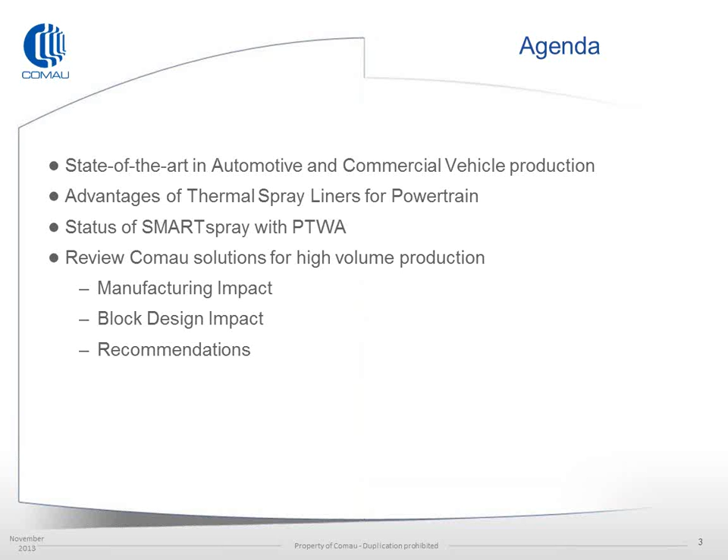We'll go over the state of the art of the automotive and commercial programs, the advantage of thermal spray liners for powertrain, the status of Smart Spray with PTWA here at Comau, and we'll review some of the solutions we have for manufacturing, block design, and recommendations for implementation of a bore spray coating to replace cast iron liners.

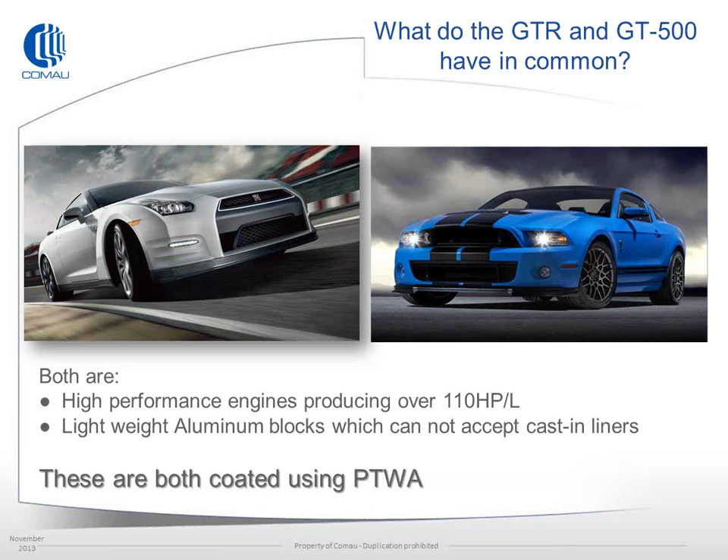Most of you are familiar with these two vehicles, the GTR and the GT500. Both of these have been in production now several years, and each of these are using PTWA in production.

Why is automotive so interested? As most of us know, most companies now are pursuing every means to reduce fuel consumption, and one of the biggest contributors are the losses due to the engine, in particular heat losses, combustion, pumping, and friction. Those are the areas we'll be focusing on mostly, but just for reference, we do have reference technologies such as multiple cylinder deactivation systems.

That roughly costs a customer or supplier $150 per unit to put into an engine. Start-stop usually contributes an additional $80 to an engine as you add larger starter motors and change the bearings to higher grades. So this gives you an idea of how much is going on in the industry in terms of people investing into the product for commercial usage.

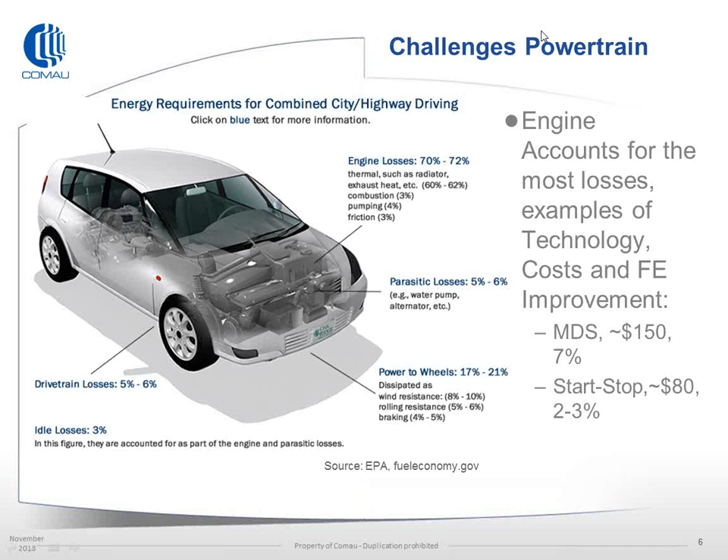What we found with efficiency and combustion is we have areas where we're losing the energy created from combustion by exhaust losses, cooling losses, mechanical, radiation, misfiring losses, pumping losses, and in that combustion zone we have a theoretical efficiency improvement from BSFC.

This information was taken from a Mazda presentation back in 2012, and a theoretical limit for compression ratio versus efficiency improvement is shown as the pink curve. What happens in the real world is we end up hitting a wall typically around 12.5 to 13, where we just can't get past that.

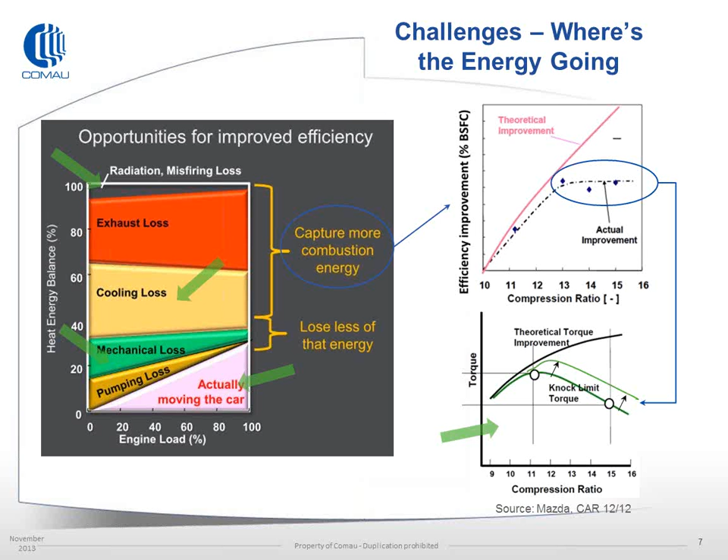Part of that is due to the temperature inside the cylinder bores initiating radiation or misfiring. What we found with thermal spray is that by improving the thermodynamics within the cylinder bore area, we can slide the knock limit curve to the right and upwards, enabling a higher compression ratio in some applications, or taking advantage of the friction losses.

In terms of the field now, there are multiple engines that have made it into the field. Both Daimler and BMW have been the largest producers of thermal spray engines, but we've seen a lot of shift from sports cars now to mainstay vehicles.

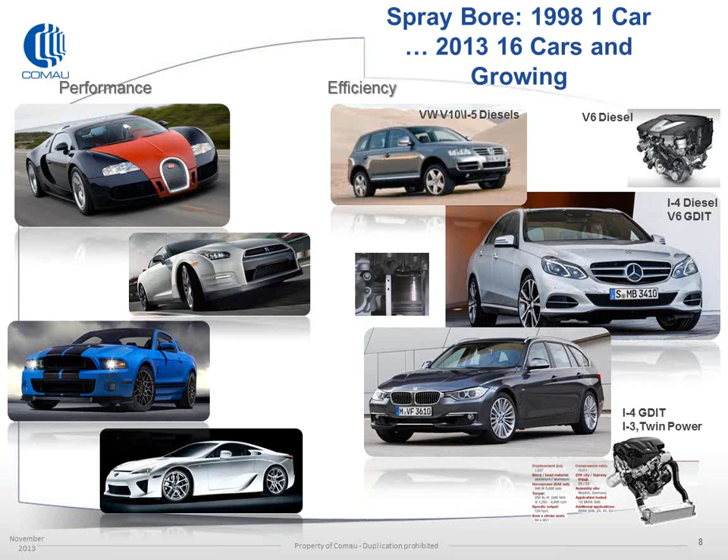In the commercial market, companies are pursuing technologies to allow them to increase their EGR. One problem with increased EGR inside cast iron blocks is corrosion of the cast iron. By using a coating system and staying even with the cast iron block, you can replace the wear surface with a corrosion resistant surface, inhibiting corrosion, while also reducing friction due to the inherent porosity of the coating. You also get a harder coating on the surface, which increases the durability of the engine.

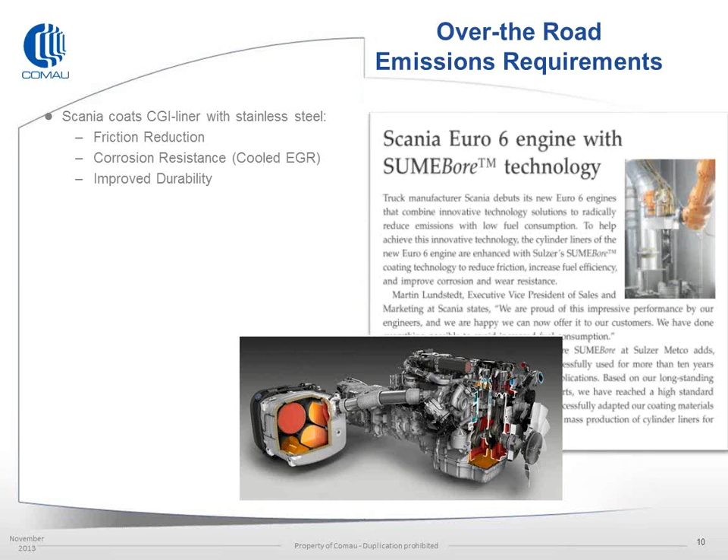Reman is also an area a lot of people have been pursuing. Part of the reason is you're able to take a fairly expensive casting, rebuild it to original specifications on the cylinder bore and other surfaces, and recoup the cost of the casting. It's particularly active in industrial and off-road applications.

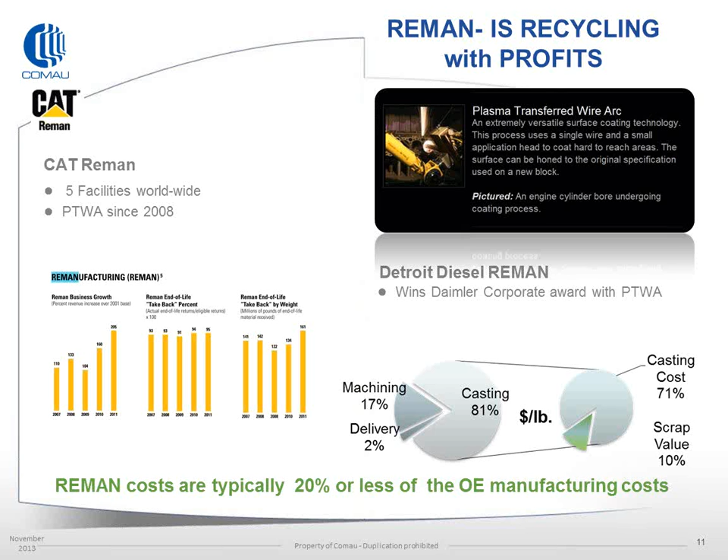The benefits of thermal spray, as I briefly mentioned, fall into three key areas. One is the replacement of the cast iron liner within the coating design itself, giving a cost reduction. A typical liner costs roughly $4 cast into an engine block. You can replace a four-cylinder block's liners with roughly $2 worth of material and spray time.

You also have to compensate with your investment, but it's a significant cost savings on an engine block. Weight reduction is another benefit, because we're able to package with a smaller liner versus a large cast-in liner, reducing the overall length of the block, which has several intrinsic values. Improved durability comes from replacing cast iron with a graphite phase with hardened steel with inherent porosity, which allows us to reduce friction as well as wear on the surface.

Item two is the improvement of thermodynamics. We have NVH and knock, friction reduction, the ability to tighten up piston clearances, and reduced knock potential from hot spots due to cast iron liners, usually caused by variation in the position of the casting.

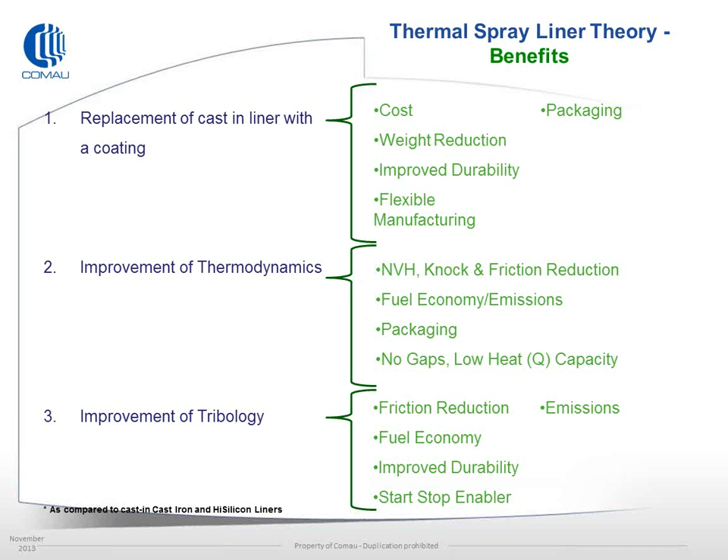Benefits go on and on, anything from start-stop capability to reduced friction, of course.

In terms of investment, this is just a rough slide. It doesn't look at any additional investment such as the rough honing we'd recommend, or any changes to your CNC process. But what we do see is, as you produce more and more bores per year and achieve a volume upwards of 100,000 bores a year, you start to see a payback period close to 2 to 3 years.

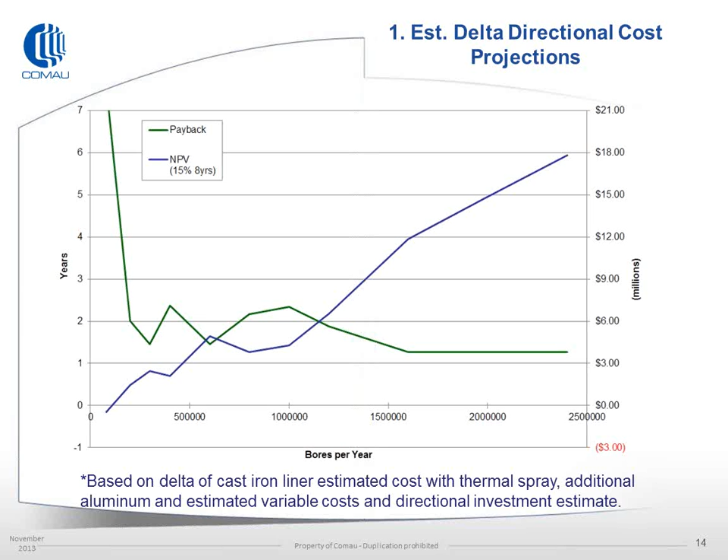While it's not a one-year target like most OEs have, it's still fairly significant because the process is flexible and isn't dedicated to one bore size or bore length. It gives you a piece of equipment you can then retask for subsequent models.

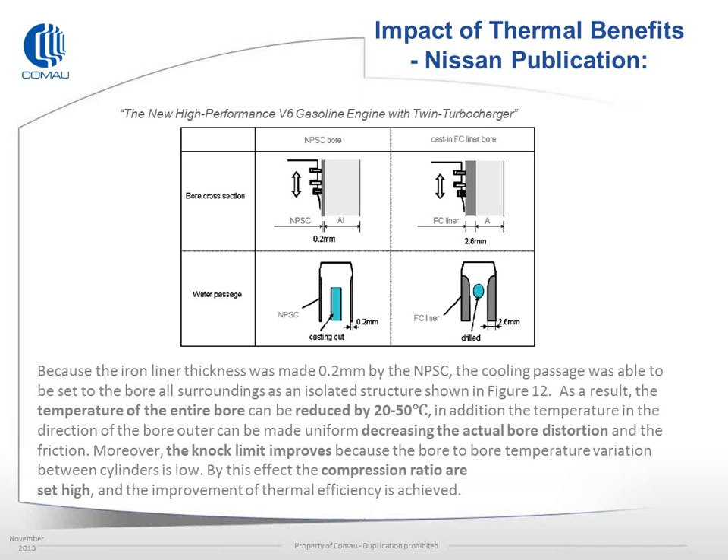When we talk about thermal conductivity, just looking at the ideal law shows that if we were to go from the conventional 2.5 millimeter gray iron, which has approximately, for a wall thickness of 8 millimeters, a system thermal conductivity of roughly 74 watts per meter Kelvin, to a 100 micron coating with 4130 in PTWA, it's roughly at 93-94 watts per meter Kelvin based on just the ideal thermal conductivity law.

So it gives you the ability to really see how much cooling you can benefit just by reducing the thickness of the layer. As you get closer and closer to 100 microns, the variation between different materials becomes less of an impact to the overall structure of the wall.

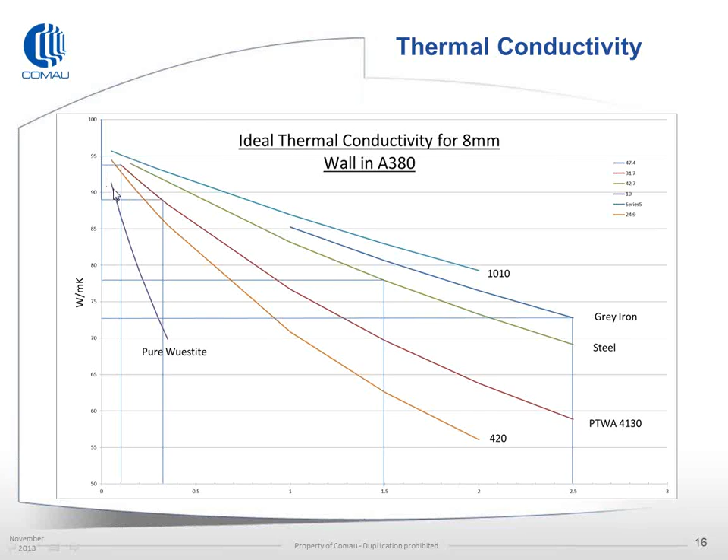Going into modeling that, on a baseline study we were able to see that liner temperature dropped 16 degrees Celsius. A significant improvement. The biggest improvement was dropping the max temperature to below 190, particularly in the bore bridge area, which is definitely a significant source of knock for most engines.

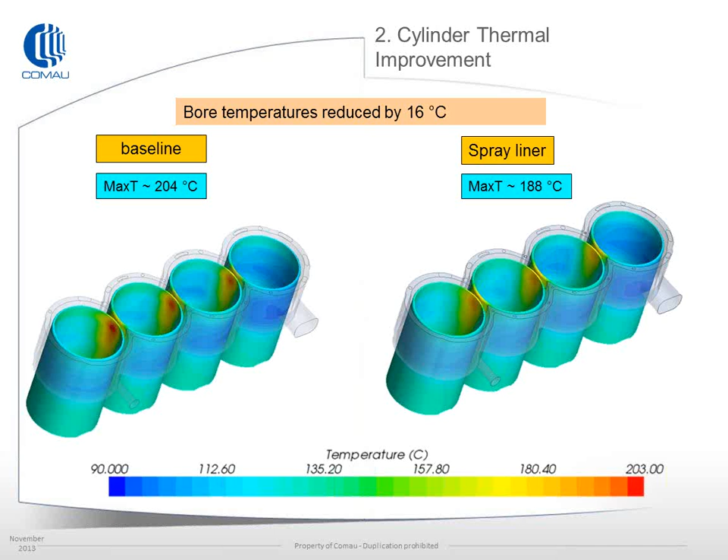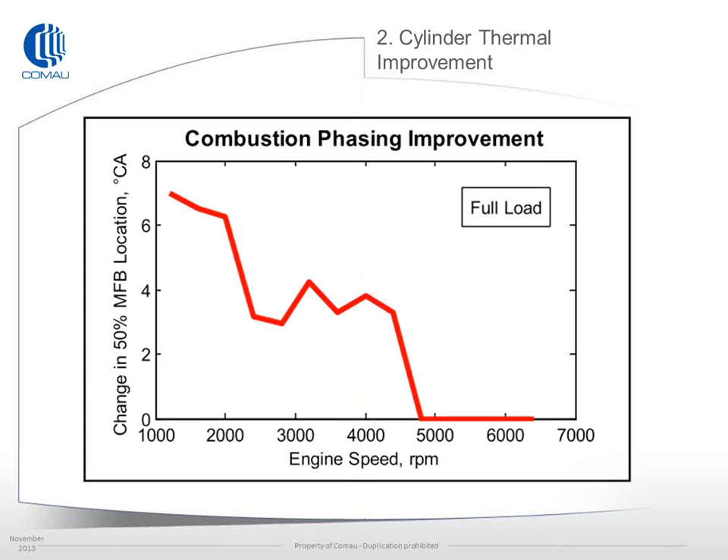Going into a Ford paper, they've seen similar performance reductions. Nissan reported the lower temperatures, and that showed for Ford a 28% reduction in idle in terms of the average torque required just to turn the engine. That improvement was duplicated over 2 different tests, and they found it to continue on all the way up to about 3,600 RPM.

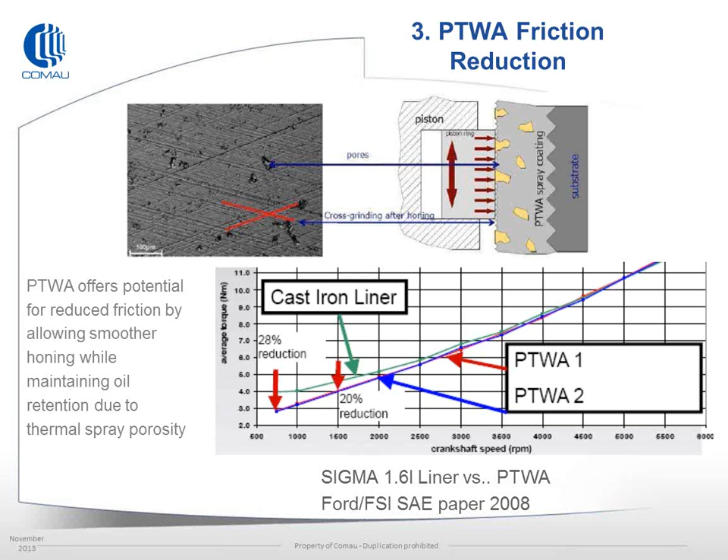We'll get into the details, but really it's this small inherent porosity on the surface that provides the ability to go into more of a hydrodynamic state with the rings and piston to the liner than just having a smooth surface.

That improvement allows a significant reduction in fuel consumption. Referring again to the paper from Chrysler to the DOE in 2012, you can see they had an improvement of up to 27% in the low mean operating range, where you typically are with an engine between 1,000 and 2,500 RPM. This is significant - it contributes to about a 3% improvement in a vehicle, which in this day and age is pretty hard to come by.

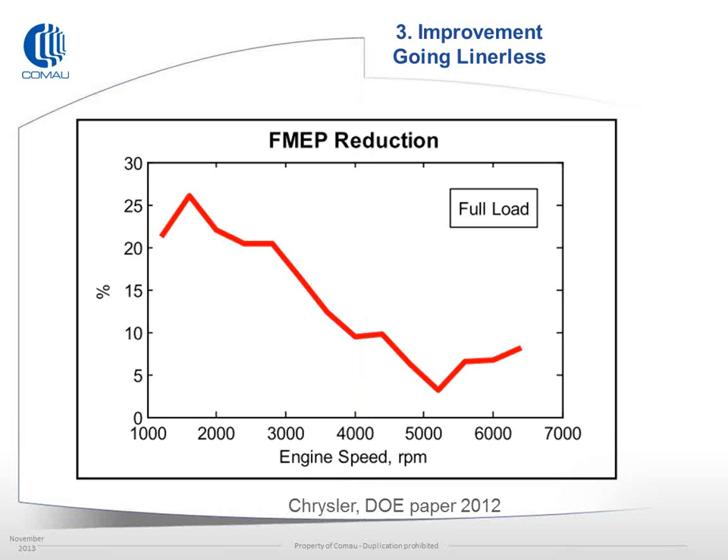So what are the different technologies that people are investing in, what we're pursuing here? The first one that went into production was the APS from Sulzer-Metco, their SUMEbore. It was great, it opened the door. It has significant issues in terms of temperature and cooling - it requires water cooling of the nozzle.

It has a plasma arc jet that's around 24,000 degrees Kelvin. You are inserting a powder stock into that jet, so the powder effectively goes from room temperature to a liquid to semi-solid or even solid, depending on how it's shadowed within the jet. But it's very consistent in porosity and surface finish - one of the smoother ones of all the applications.

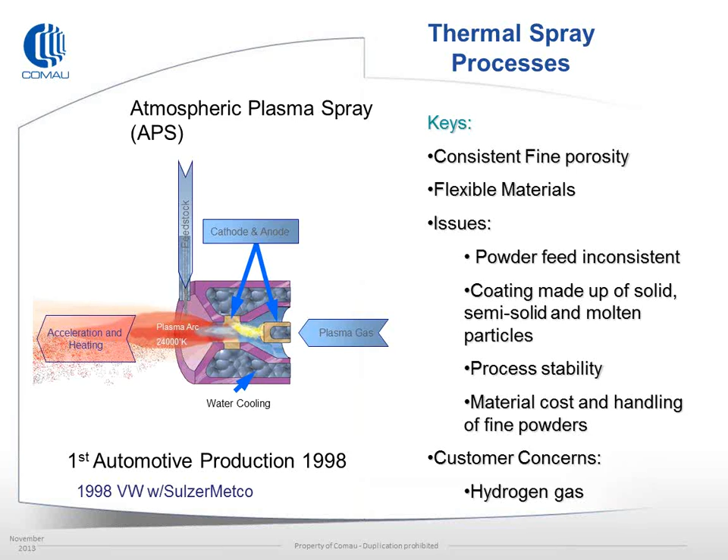In plasma transferred wire arc, we have an arc temperature of roughly 7,000 degrees Kelvin. We use a cathode to create a plasma field between that and the anode, which we use as our consumed wire. We don't use this for propulsion - it's only used to melt the tip of the wire.

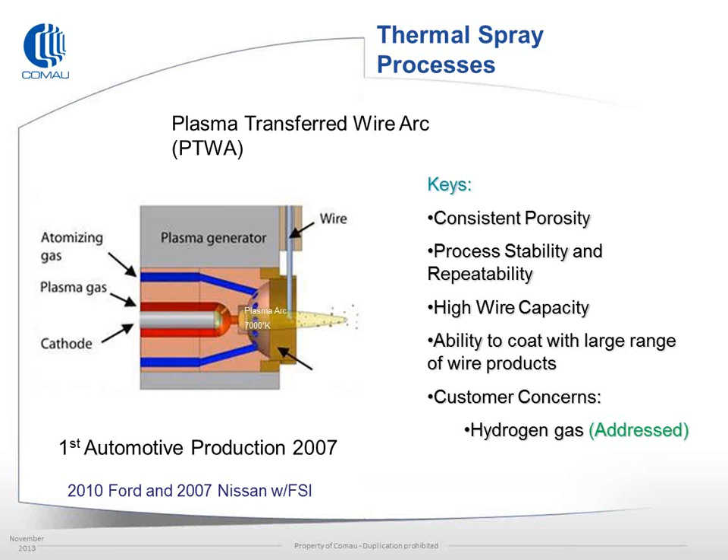What we have is an atomizing gas stream, the blue lines you see coming in through multiple orifices around the plasma field. This is what creates the atomization and acceleration of the particles towards the surface. We can flip between different gases depending on which type of coating people prefer, but typically we're using compressed clean dry air. As I said, it's been in production since 2007 with Nissan and 2010 with Ford.

The LDS, or twin wire arc, has been in production since 2005. Basically here you have two wires, one acting as the anode, one as the cathode. You're creating an arc between the two - it has roughly a 3,000 degrees Kelvin arc, much smaller.

You end up with slightly larger particles here. Your gas jet is typically nitrogen based, which allows them to pick up the wire and maintain a stable arc. Atomization again and acceleration of the particles is created by the gas jet that's fed from behind the arc point.

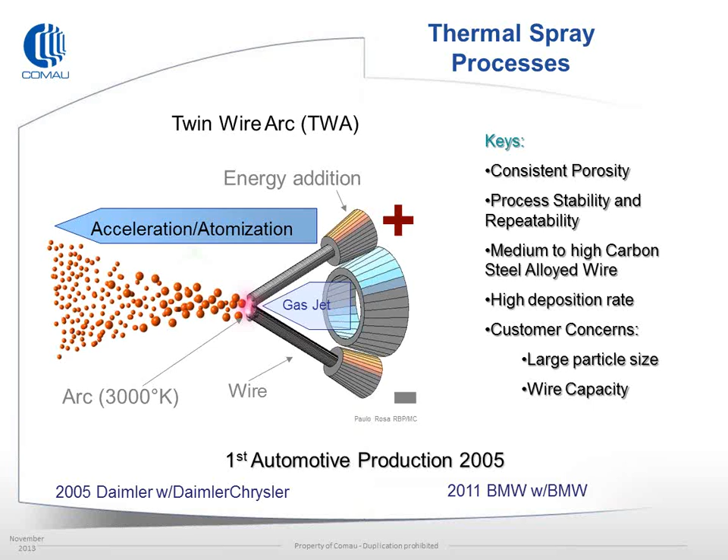Overall, when you compare the different processes between nanoslide and smart spray, both have very high operational and material usage. Deposition rates on PTWA are around 92%.

In terms of the ability to spray different materials, both nanoslide and smart spray use a wire-based material. The nanoslide uses a 1080 or a high carbon steel, while the smart spray, using compressed air, can use as low as a 1010 and any high carbon or modified alloys. Cycle time for a nanoslide is typically 30-ish seconds.

At 85 amps, we're around 60 seconds for an 84 millimeter bore, 4-cylinder. At 150 amps, we're just under 40 seconds.

In terms of running time and changeover time, the LDS is limited by the wire that's carried on board. Smart spray we feed from an external wire supply, and we're able to butt weld the wires, so we never have to shut down for a wire feed or change.

For us, the time that we have is really the interval to change the arc torch, which has a life depending on how you're operating. If you're operating with a constant start-stop operation, it's 70 hours, and it pursues up to 100 plus hours if we run continuous on the torch life.

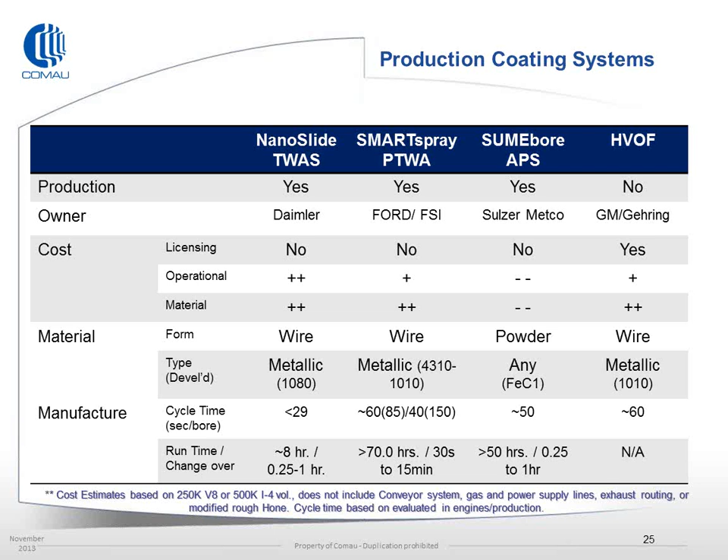In terms of surface roughening technologies, this is really a package that everyone's looking for. Most customers, some of the early adopters, have developed their own. Some of the new to the market are looking for assistance.

Some of the first technologies that went into the market are grit blasting, which is one of the oldest surface prep technologies. It creates a very random and rough surface. It's difficult to measure, count, and identify the quality of the surface without an adhesion test. One of the more major issues for production is cleanliness. Grit blasting tends to create a lot of statically charged fines, and these tend to adhere to the surface quite well and make it difficult for cleaning and coating afterwards.

The second process that's really taken off is water jet. This process produces a very clean and complex surface, also difficult to measure and assess, but it has a very high quality surface and very high adhesion results. The one shortcoming with water jet is its ability to ablate and open up any casting issues, particularly in die cast. But those are things that can always be evaluated and developed.

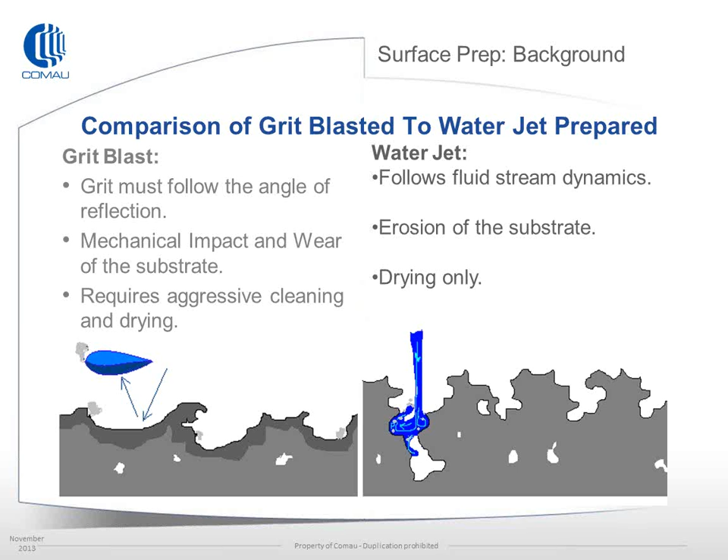But for now, the trend seems to be moving towards, from our side at least, mechanical surface roughening. In mechanical surface roughening, the first one in the field was Nissan with the GT-R. They created a mechanical surface that had a break in it, effectively creating something between a machined and broken surface with very good adhesion results.

This kind of brought everything back up that's been published since 1953 regarding cutting a groove and deforming it. So this has become a mainstay for most people going into the market, looking at a process of cutting a groove and deforming it.

The Honsel and Gehring process, which I didn't mention here, are both a threaded type process. They will cut a groove and then deform it within their same process. Honsel has it integrated into their tooling. Gehring has a separate roller.

Ford has developed their own process, and it's near production, and it allows them to do an interpolated circle, and this is kind of where I see the new future going, to a prepped surface that allows you to selectively machine areas. One of the other areas that's used often for prototypes is called Braunschweig.

It's a tool that requires no post operation. The undercuts are created by the tool itself. The tool here is also a thread-formed tool, so it'd be chased through the full thread, so it really limits the application and requires a clean exit and entry in the bore.

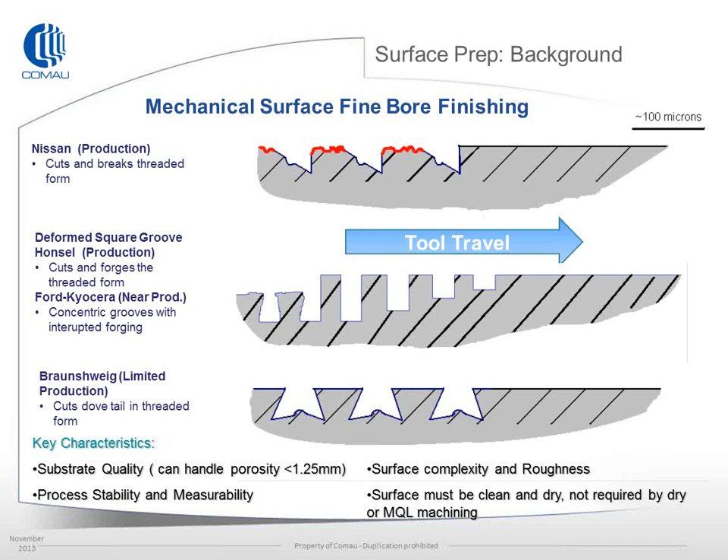The nice thing about the mechanical prep surfaces is you can easily measure these surfaces with a profilometer. There's a lot of question about how do you know about the undercut. The profile that's created by a well-prepared surface is definitely different than a surface that doesn't get prepared well, and I can give you an example of that in a moment.

In terms of surface preparation, as I said, there are several different technologies available in the market, one of which will be coming eventually. We've been testing and evaluating it. It's not in our area to license it, but we plan on providing that as a solution to our customers. It's based on similar technology as the other mechanical ones. It will allow us to do a concentric selective bore prep if we want, or a full bore prep.

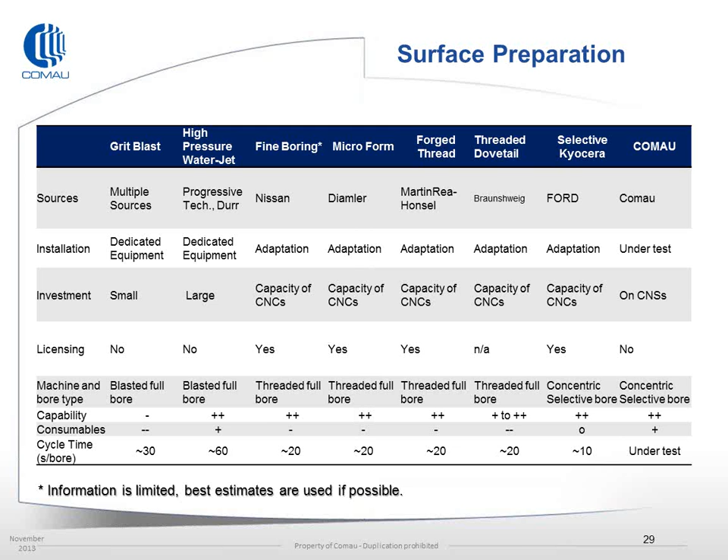One of the issues most people have is how do we assure adhesion. As we've gone through and done a lot of mechanical testing, we can find in our test samples, using a standard pad gauge, that we can pull up an adhesion sample right off the coating and measure the mechanical bond strength using a simple button that's glued to the surface.

For most of the results we see now, typically adhesion properties for any mechanical prep are above 45 megapascals, but once we have a good tuned-in process, it's consistently over 50.

I know there's been a lot of talk in the market about what the limit for your lower adhesion level should be. Roughly 21 to 23 megapascals is the load created by the honing process. In my opinion, Volkswagen has been in production for many years with coatings below 20 megapascals. So from our side, to make calculations in terms of capability, 20 megapascals is a sufficient lower limit.

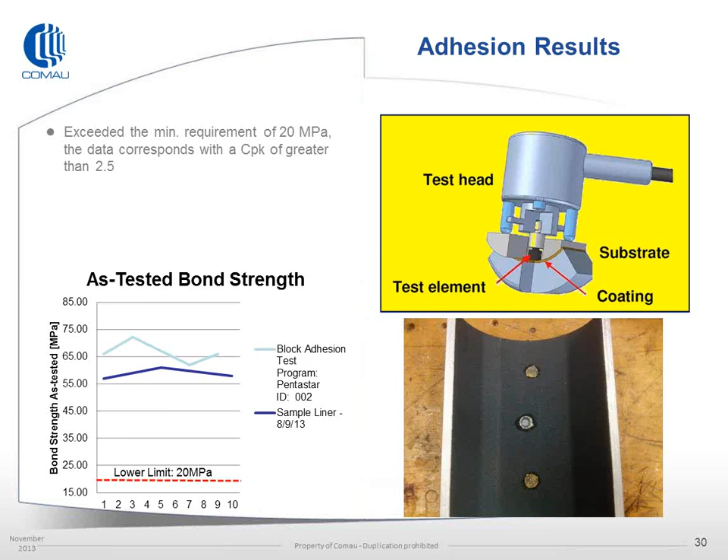If you start to pull it up, it just makes CPK calculations harder. Most processes stay well above that limit. These are just reference numbers, but everything that's been evaluated has produced adhesion results around 50. These aren't guaranteed results, it's just giving you an idea of the difference between a grit blast, water jet, and the various mechanical roughening processes.

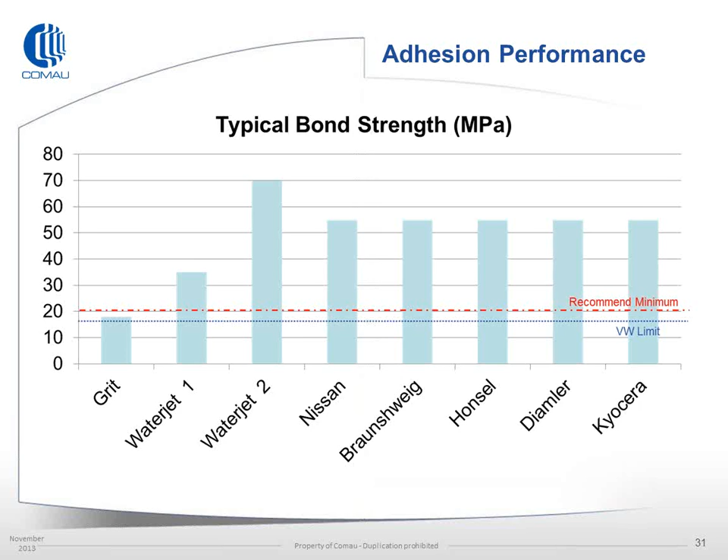The selective prep process being evaluated can produce a grooved area, and then through mechanical deformation of the positive portion of the grooving, we get a dovetail formed by the deformation, providing sufficient adhesion results.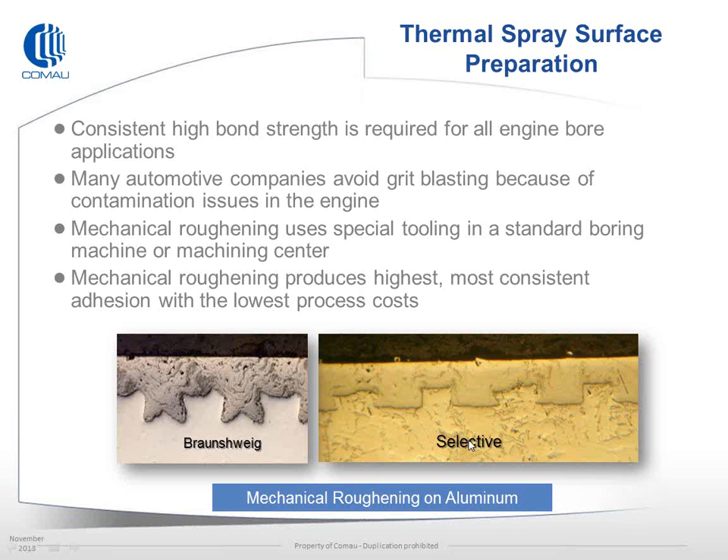When I was talking about how to quickly verify between different surfaces in terms of prep, this is an example of a Braunschweig, and what we're looking at is the wave profile of the prep surface versus a prep surface that ran 2% out of speed.

You can see that even with a good tool, a bad part could have been produced, but geometrically the numbers are completely wrong. Height-wise, it's actually about half the height of a good prepared surface, as well as the waveform or wavelength being much shorter. So these are numbers that are easily calculated and measured and compared between different samples.

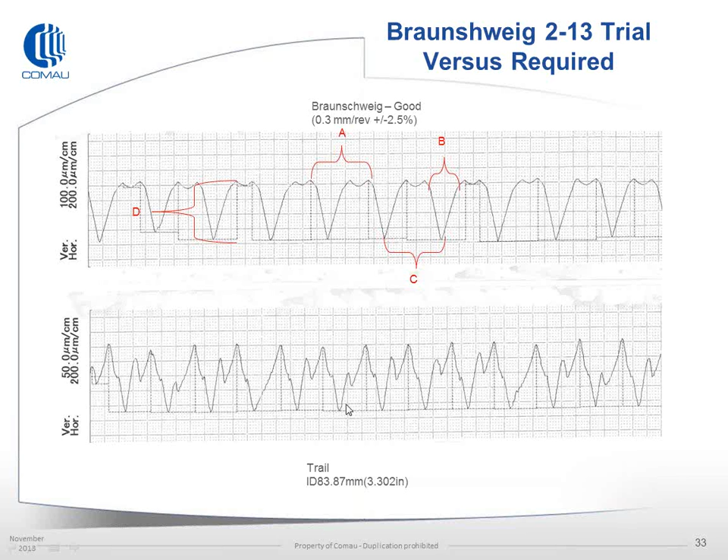In terms of coating characteristics, we have the ability to spray with air and nitrogen with PTWA. The advantage of spraying with air is that when we spray a low-cost alloy like 1010, we're able to create a metastable wuestite, or FeO.

This provides a lubricious and wear-resistant phase. The FeO fractures across the basal plane, providing a very good lubricious nature to the coating. If we were to spray this with nitrogen, we would create a very fine level of oxide between particle splats.

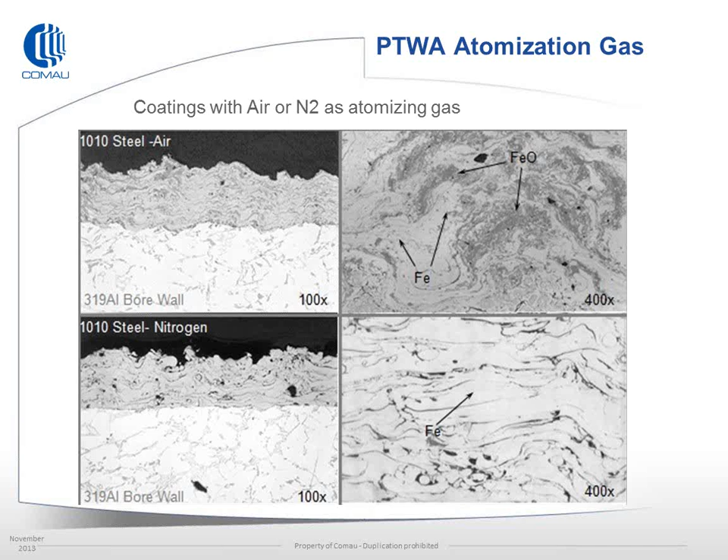In terms of the basic coating, when we do use a 1010, it's a low phosphorus, low sulfur, 0.6 manganese wire. It's very compatible with piston rings.

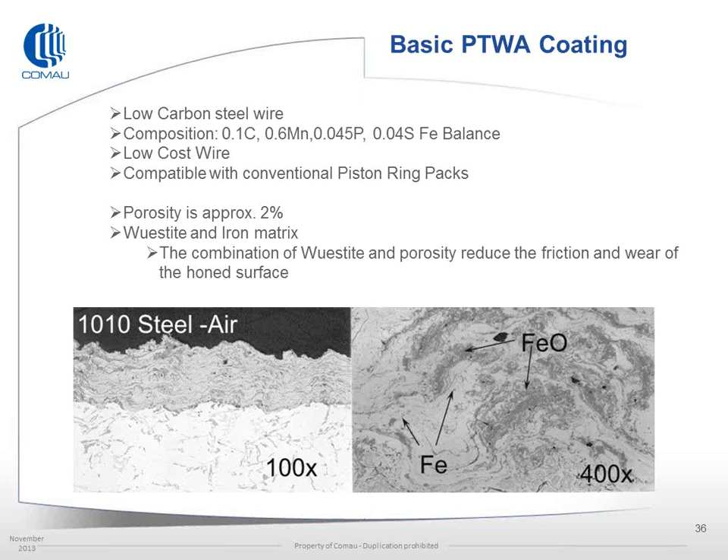Typically the porosity range is 2 to 4%, nominally around 3%. The performance we see here can be improved if we increase the porosity to the 4 to 6 range, which is easily controllable within the machine.

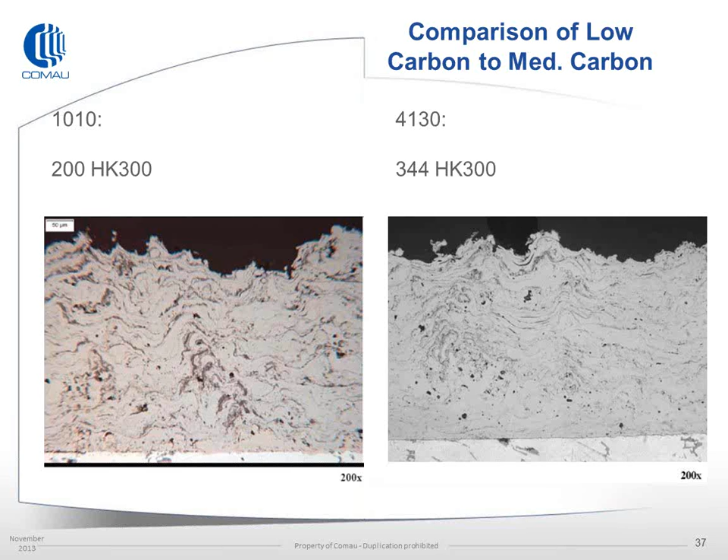The flexibility of the system, like I said, we can also spray a 4130. The difference in hardness created by spraying 4130 or 1010 with air changes based on the carbon content. With the higher carbon content and alloying phases of 4130, we get an increase of approximately 70% in hardness. Part of this hardness issue is what creates post-machining issues for boring, and why we recommend going with honing.

The porosity is fairly well random, almost a random homogeneous distribution. So the coating will have similar porosity throughout its depth and across the length of the coating.

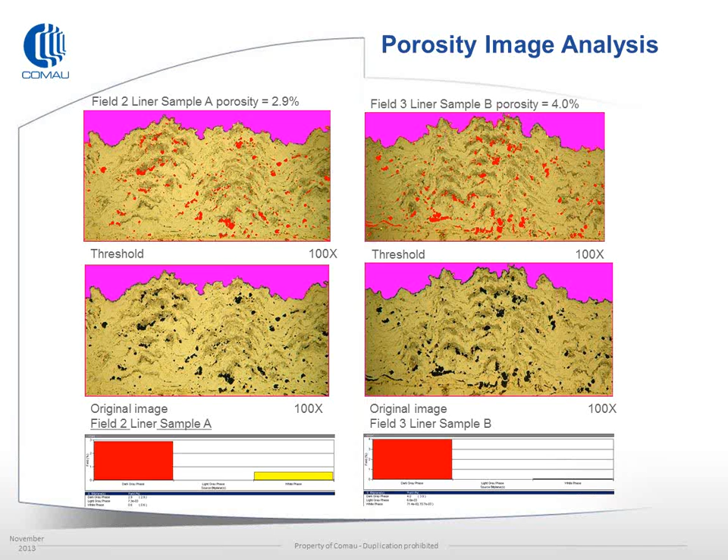In terms of manufacturing, a lot of questions are, well, can we not do surface preparation much sooner, in rough, or even at a sub-supplier? Currently our recommendation is to focus on the final machining, or if you have a very stable locating system, you can do it much farther upstream. The main reason for this, and it has nothing to do with PTWA particularly, is when you're targeting a 100 micron surface, you have to take significant care on your locating features so that your true position for your bore centers, which is set by the surface prep, is maintained throughout the process. So the sooner you cut that surface, the more care you have to take through the process in maintaining that position.

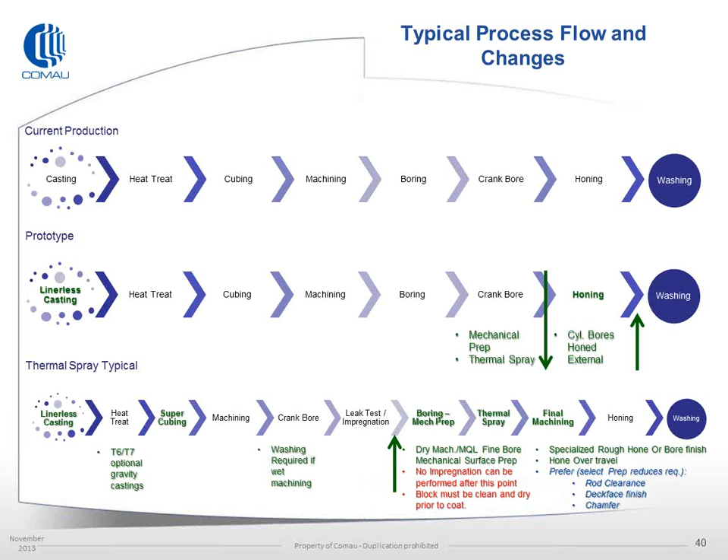In post-operation, after coating, if you're doing a non-selective prep, where you've actually coated through the bore into the crankcase, we found that a high-pressure wash has the ability on die cast to easily remove it. On sand cast, it would be recommended to do a shadow mask with a small amount of jet washing. It definitely allows us to remove the coating throughout the bottom area without delaminating it into the bore.

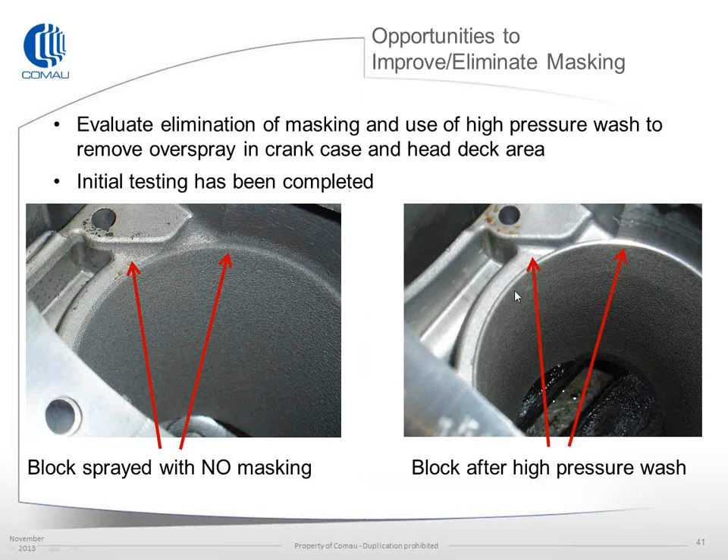Some of the changes integrated into the block design: typically the chamfer at the top is placed in prior to boring. This would be recommended to be done after the coating process because we would like to have a square entry for the surface prep as well as the coating process, and have that cleaned off. Again, this is only if we're talking a full bore coating prep.

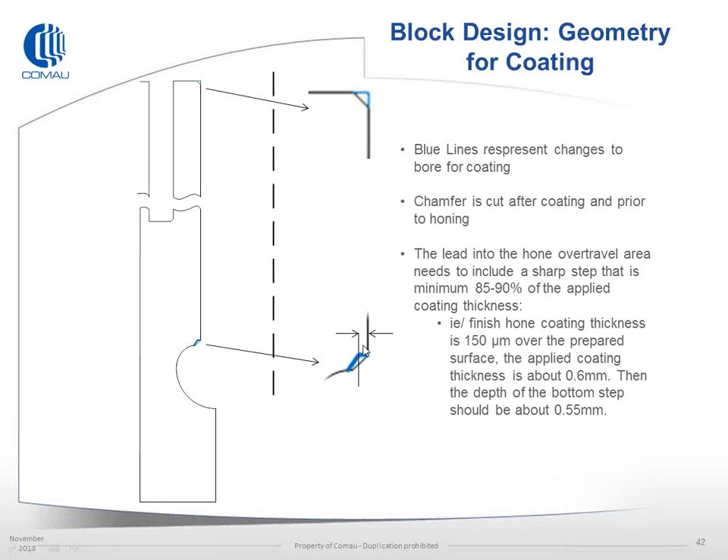Similarly, at the bottom of the bore, typical applications have a blended chamfer into the bore. It's recommended to put in a step that's at least 85 to 90% of your target coating application. This will allow for a significant break point at the bottom of the bore to minimize any chipping or breakage into the bore area from the coating to the non-prepped surface.

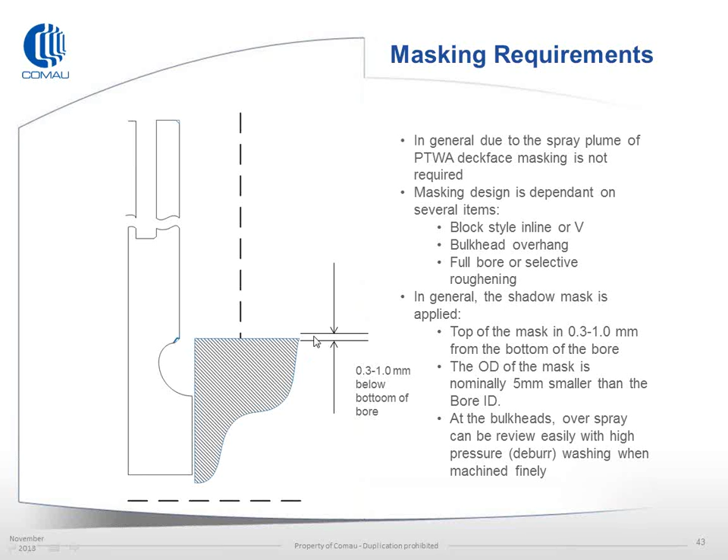When I mentioned earlier about a mask tool, what we mean is a shadow mask would line up within the bottom millimeter of a bore. The one area that we can't get masking easily into is over the mains and the breather passage. So in this area, jet washing will be required. The other areas just need limited remachining and cleaning up of the hone over-travel.

When we come to bore tolerancing, the reason I mentioned our recommendation is to put it in the finish zone is due to investment. If we were to apply the coating much sooner with typical bore tolerancing, I would have to change my finish coating target to about 355 microns from 150, for an example. That would change my applied coating significantly to compensate, and as such the coating cycle changes by a third, increasing it. This then increases your investment by a third, by adding additional equipment or capacity required.

The reason for some of the roughness: you may be wondering why our target coating finish after hone is 150 or 350, and we're applying approximately 400 microns more. With mechanical surface roughness, the profile gets translated through the coating as well as the inherent surface roughness of the coating. That compounded fact creates a typical surface roughness of around 360 microns, which needs to be coated sufficiently to be beyond your final machine surface. So compensating for bore tolerancing as well as coating tolerances is the reason we target an additional 400 of overspray.

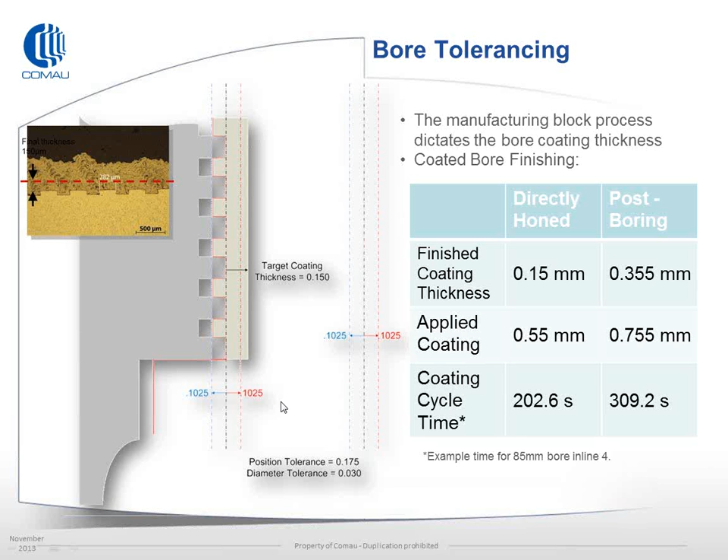The first generation coating cell, created by Comau at the beginning of this year, has been delivered and is running manufacturing trials. It was a simple concept. Originally, gantries were evaluated, but due to the cost of investment for the gantry into the cell, it was decided to go with an enclosed robot system.

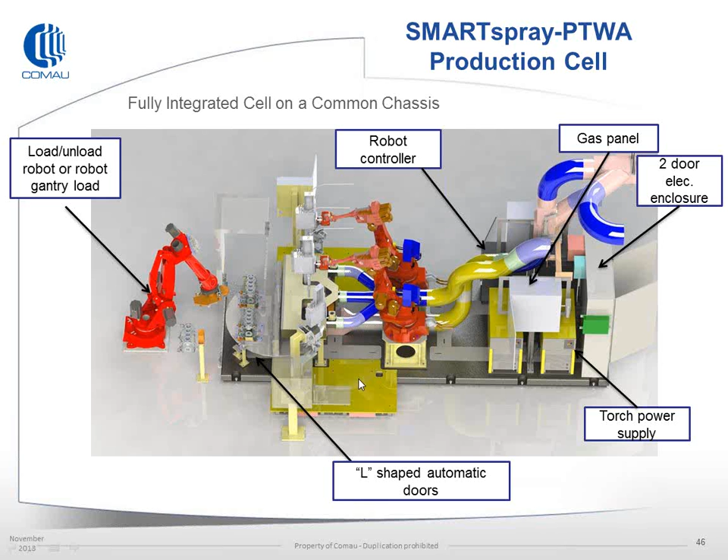They'll go out to a HEPA filtered dust collector and return. The return gas pressure or air is roughly 4,500 CFM, so that we maintain always an internal vacuum inside the cell to reduce any gas escaping from the cell or fumes.

What you see here is the basic unit has been constructed and was prior to shipment. We have installed in this unit the ability to integrate with a Tecnar. This allows us to do spray monitoring at a stationary station in the center of the box here. This newer cell has eliminated the passage, and we've gone to just an entry point. The nice thing about having a Tecnar on base is it gives you a checkpoint that you can check roughly the life or stability of the torch as you're running.

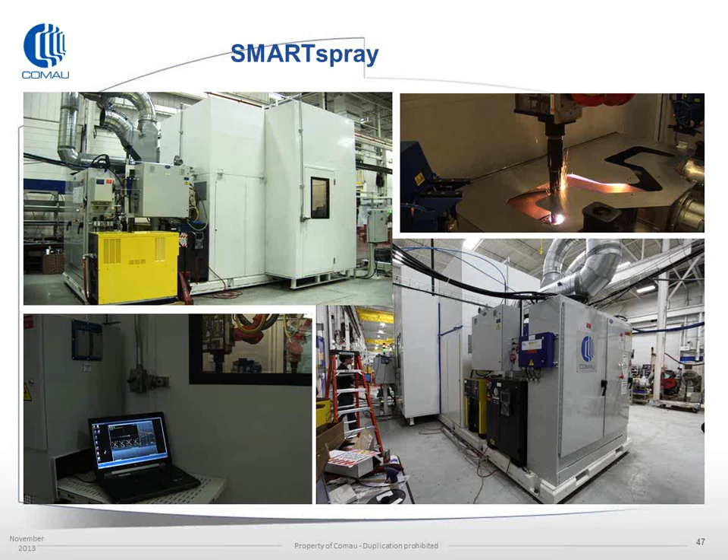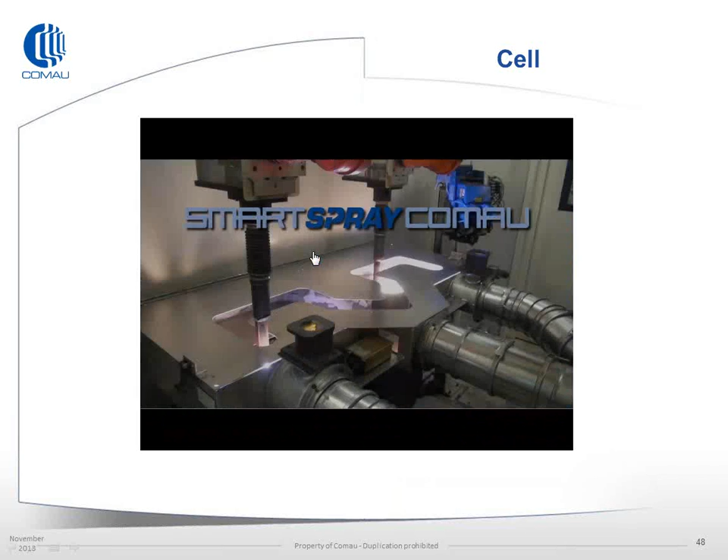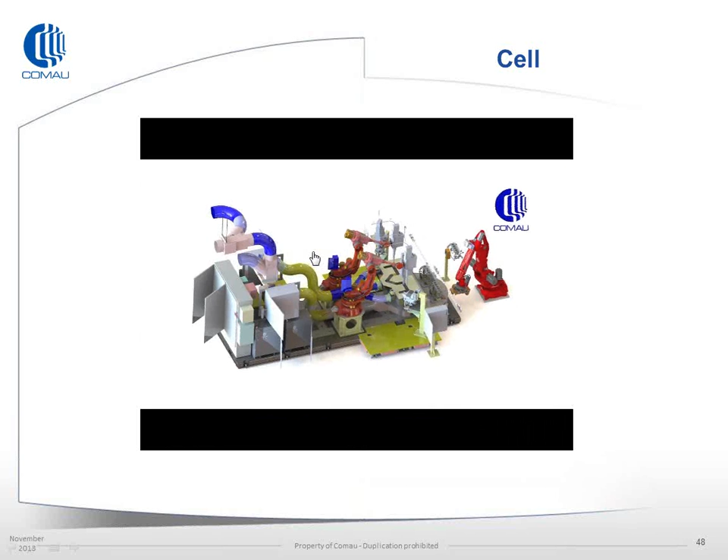And I'll go over this operation video here. The original video was created for a manufacturing show, so what we'll have is a full video starting from the loading and unloading, some of the features that we've gone through, both with our partner Flame Spray and some of the customers' desires.

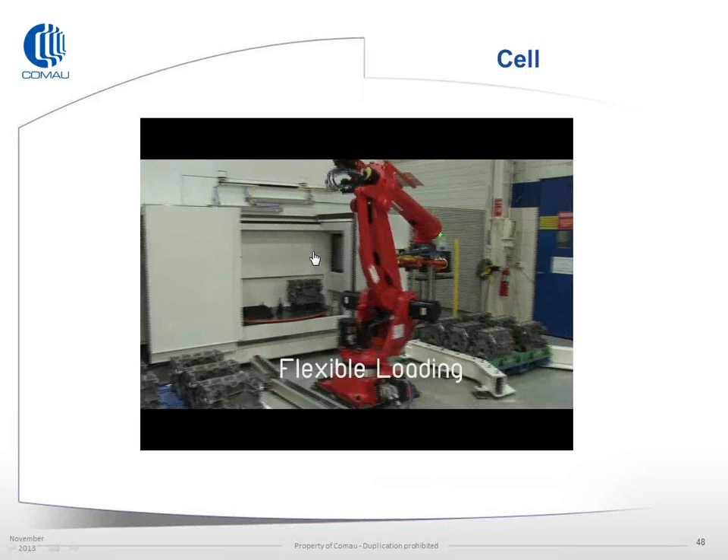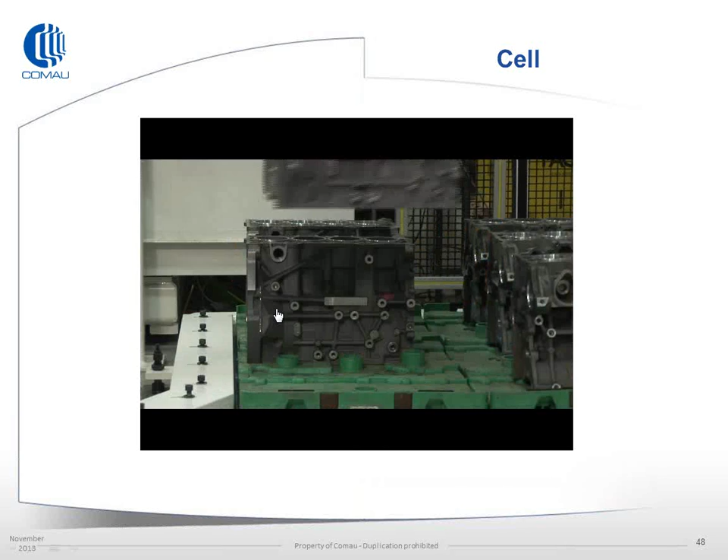The cell itself has the ability to be gantry or front-loaded, whether manually or by robotics or automation. The cell also has the ability to interface with a barcode reading system and track every engine block coming through. So on the far right side, which is covered by the robot currently, was a barcode reader that each block was scanned prior to loading.

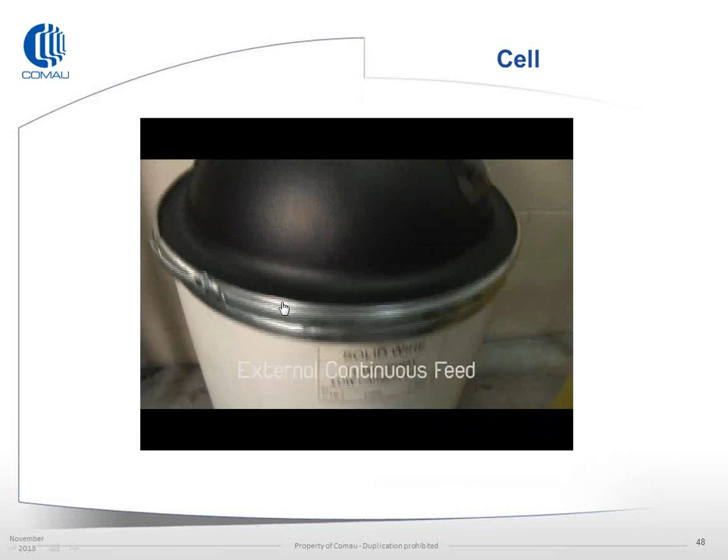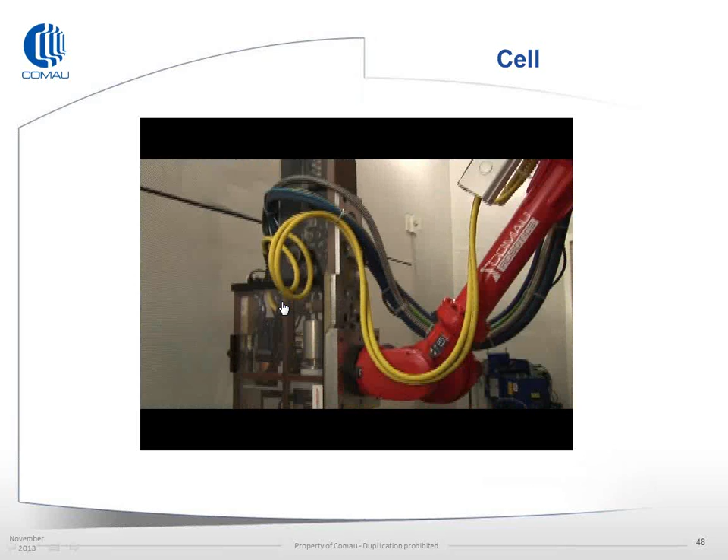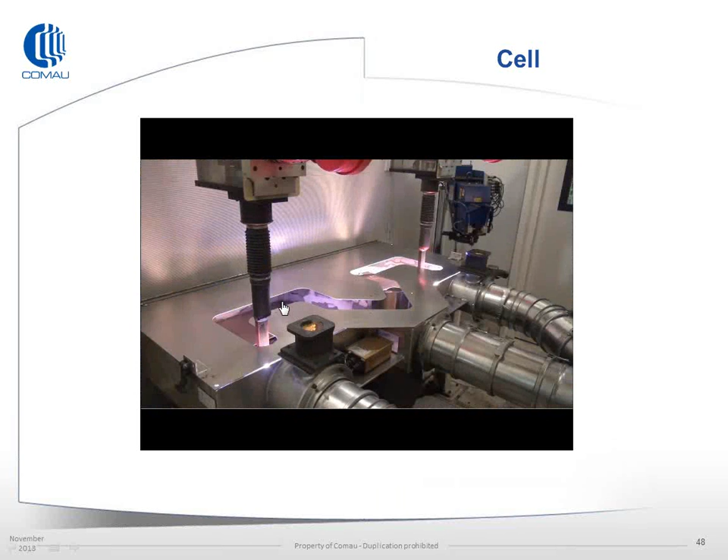The doors close, and the reason that we do that in manufacturing is we'd be using a continuous torch operation. The reason for that is the torch arc life is less—there's less usage of the cathode if we don't keep igniting it, and really the torch life is dictated by the cathode and the buildup within the torch.

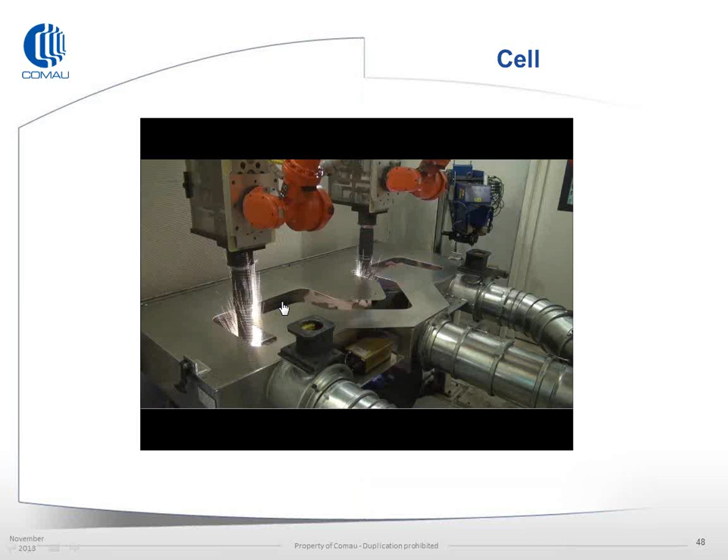So what you've seen is we start both torches in a stationary position and spraying down into the suction system. Once we start spraying, we'll move to the coating locations, do approximately 4 to 5 passages depending on the bore size and bore length, and then repeat that for the following cylinders.

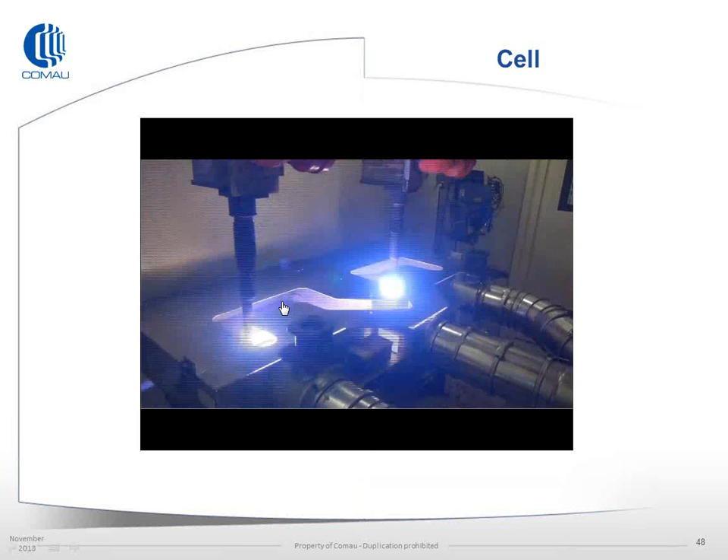In a manufacturing process, we'll keep the torches operating in between part changes. For a prototype cell or initial prototype runs, we weren't running as often, so we were shutting down quite regularly.

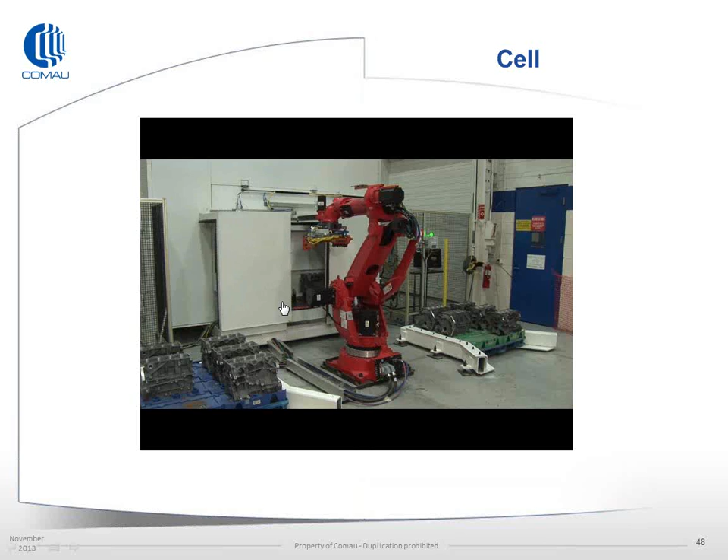So our second generation, which we were already in the process of producing here, has gone to adding a larger table to accommodate some significantly sized blocks. We've also reduced the size of the power supply when we use an 85 amp system.

But one of the more significant changes is that we've added the ability to produce hydrogen on board. The reason for this is due to the regulations around pressurized hydrogen. It's much simpler for us to provide hydrogen on demand to the cell and be well below any requirements for permitting. It makes it a much simpler system and allows us to provide a simple package to a customer without a large impact to their manufacturing facility.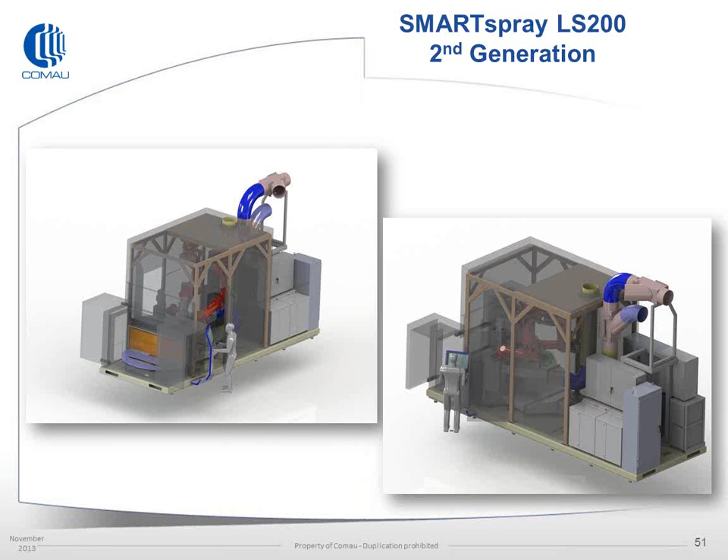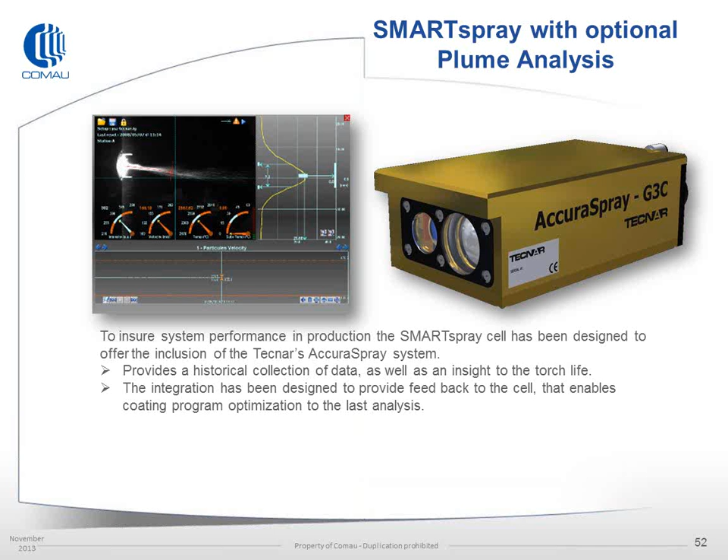As I mentioned before, we've been able to integrate the AccuraSpray from Tecnar. The ability to do this allows us, on a regular basis—whether it's every 100 hours or every hour or every 20 blocks—to bring the torch to an inspection location, run the torch, characterize and record the plume, put feedback back into the system if there's any change in the plume direction, compensate for changes, and then continue, or even predict torch life and be able to ask for removal or replacement of the torch.

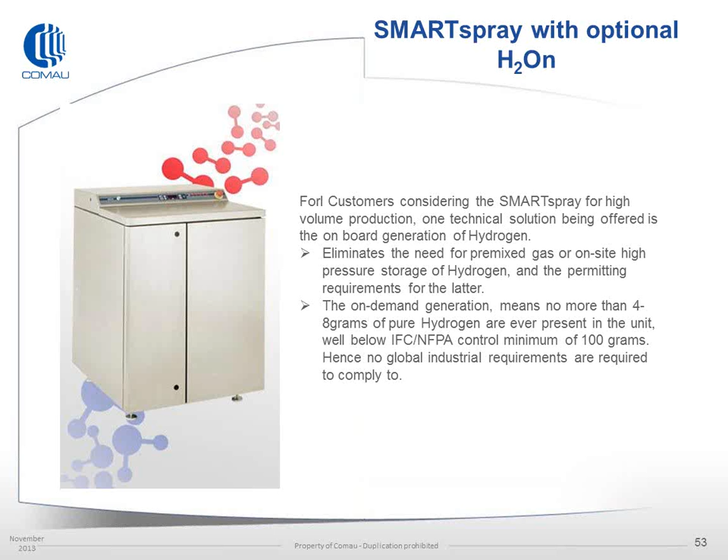As I mentioned earlier, we've gone to what we call H2On. This eliminates a lot of the IFC and NFPA requirements. We only have 4 to 8 grams, depending on which units we're using, of pure hydrogen on board, well below the international limits of 100 grams. This eliminates a lot of the on-site storage issues and gas delivery issues. By having the hydrogen located very close, you're able to control and mitigate a lot of the issues there.

When we move on to inspection, we've had a lot of discussions with several customers. There are 2 inspection systems that we've been evaluating, one for post-honing and one for measuring prior to. We're still in the process of developing these, but they show significant merit for the applications, giving us the ability to characterize the porosity after honing, which is not an issue. We're not using it for characterization or control of the process. It's more just a quality check.

We do control it quite accurately through the parameters in the cell and maintain those. The other area that we're targeting is the ability to inspect the rough castings, the roughened surface, and also the post-coating. These will be going through trials soon, early next year, and hopefully we'll have a solution by the summer.

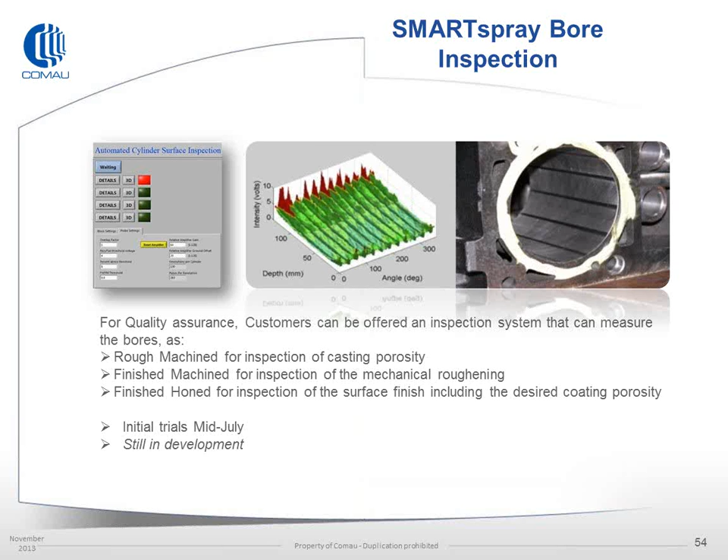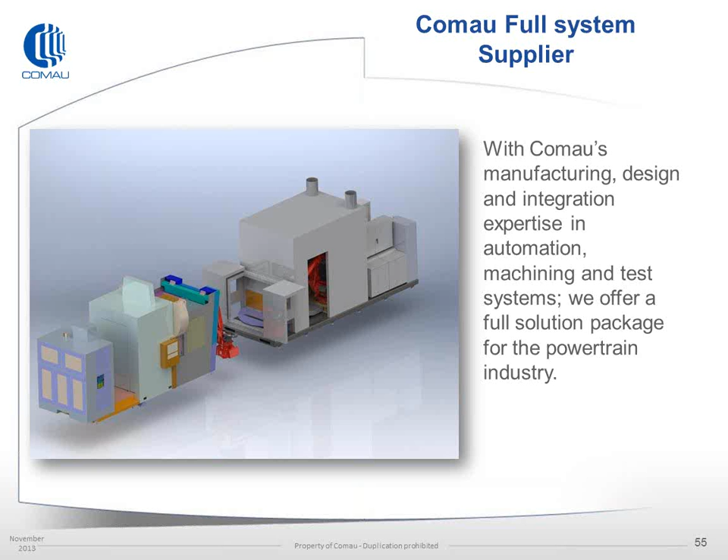As Comau, we have the ability to provide a full system. We've taken and leveraged some of our technology from our CNCs and our robot systems to create a well-operating and much more efficient package for providing a coating to systems.

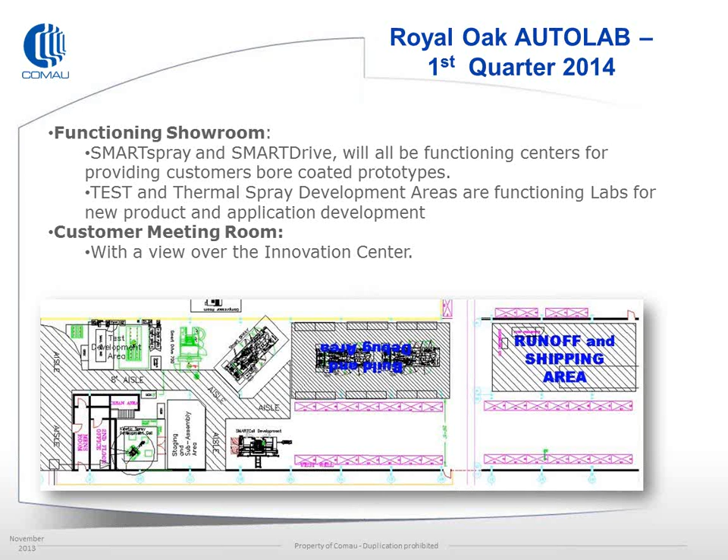Later this year, or early next year, pardon me, we'll have the ability to provide everyone a nice quick peek to an actual production cell. We'll have that here sitting in our facility for customers to review.

In terms of our background with our partners in flame spray, we are able to bring to people 50+ years of thermal spray liner coating experience. We have the ability to prototype engine blocks up to 900 pounds down to 67 millimeters in bore. We have the ability to hopefully early next year down to 37 millimeters. Production development, again, we have a broad experience in engineering and handling this technology, so we are able to do and answer a lot of these questions.

We are expanding our customer support base. We now have individuals in Europe and in Asia who are being trained and learning the process, as well as we're expanding our ability into Mexico.

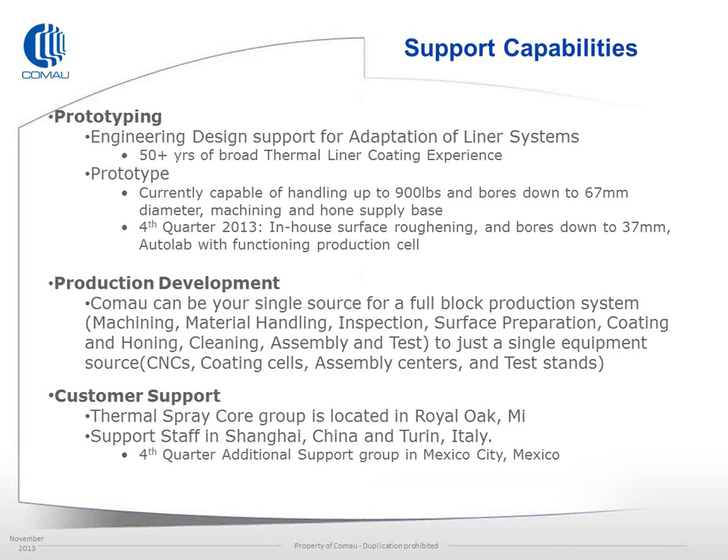With that, I'll open the floor to any questions.